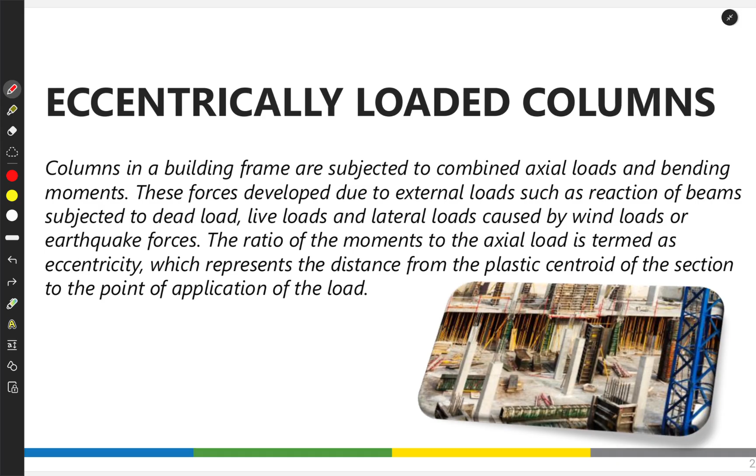So, just a recall, if we want to determine the plastic centroid of a column, that is the combination of the effect of the concrete and the steel from our columns. So these are the failures which occur due to crushing of concrete and the yielding of steel bars.

First, pure flexure. For our pure flexure, the section in this case is just subjected to a bending moment MU, where the axial load PU is equivalent to 0.

Second, compression controls. This occurs when there is a large axial load acting at a small eccentricity. Failure occurs by crushing of the concrete on the compression side with a strain of 0.003, whereas the strain on the steel on the tension side is less than the yield strain, that is ES less than EY. So therefore, Fs is not equivalent to Fy.

Third, tension controls. This occurs when the axial load is small and the eccentricity is large, causing the tension steel bars to yield before actual crushing of concrete. At the point of failure, the strain in the tension side, ES, is greater than EY, whereas the strain in concrete reaches 0.003.

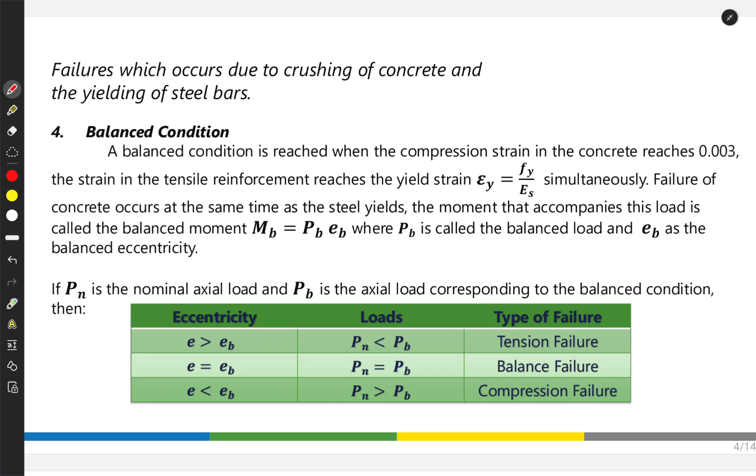For our balance condition, a balance condition is reached when the compression strain in the concrete reaches 0.003, and the strain in the tensile reinforcement reaches the yield strain simultaneously. Ibig sabihin, sabay na na-reach ng concrete yung kanyang maximum strain, which is 0.003, as well as the yield strain for the steel. Failure of concrete occurs at the same time as the steel yields, then the moment that accompanies this load is called the balanced moment.

And the balanced moment will be equivalent now to the balanced load multiplied by the eccentricity, where PB is called the balanced load and EB is the balanced eccentricity. And if Pn is the nominal axial load and PB is the axial load corresponding to the balance condition, then we can conclude these scenarios.

So if our eccentricity is greater than the balance eccentricity, or dito tayo sa ating load magbase, if the nominal load is less than the balance load, that is tension failure. If the nominal load is just equivalent to the balance load, that is balance failure, and if the nominal load is greater than the balance load, that is compression failure.

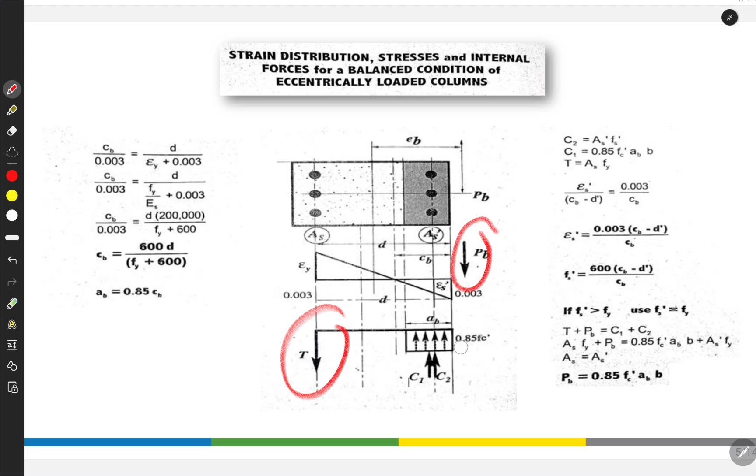F prime S is equal to Fy, so meron tayong ilan? 1, 2, 3, 4 - we have 4 forces. Ito, parehas sila ng direction. Yung C1 at C2 parehas sila. So we can say that T plus P balance is just equivalent to C1 plus C2.

So if we are going to substitute the value of our T, which is ASFY, and yung P balance, as well as yung C2 coming from the steel in the compression side, and the concrete from the compression side.

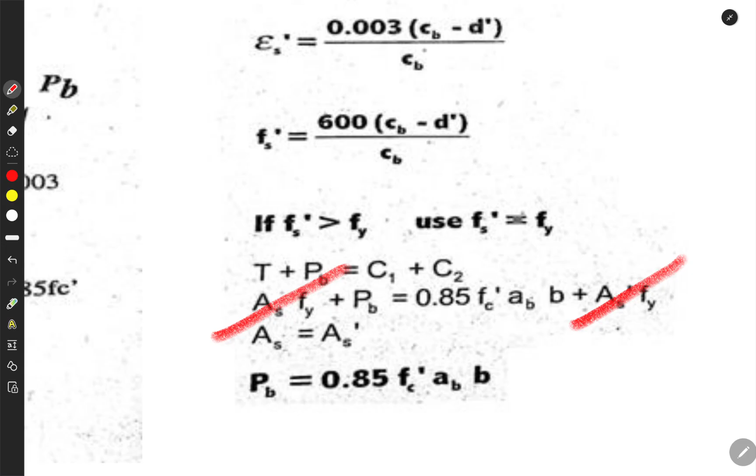Kung mapapansin nyo, kung same lang yung number of bakal dito at dito, diba, same lang din ito, same lang na rin ito. Pero kung ito ay Fy, and if F prime S is greater than Fy, then we will be using Fy, so Fy na rin to. Kung mapapansin nyo, makakancel na tong parehas na to. Ito na siya, so ang natira na lang sa ating equation ay ito na lang.

Okay, so therefore our balance load ay ito na.

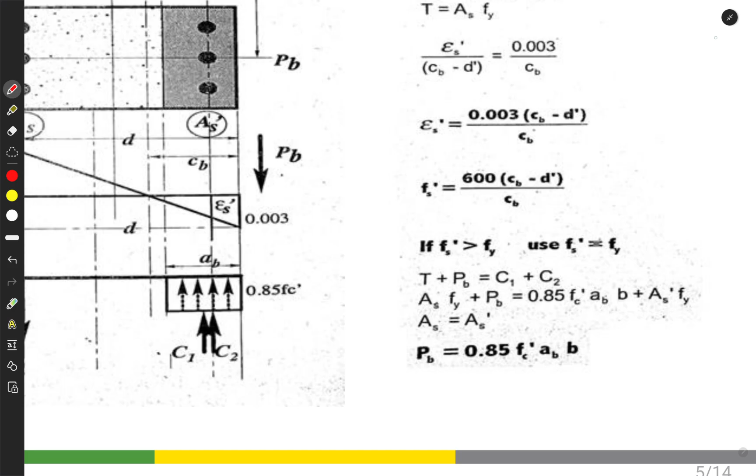So to further understand our topic, let's try to understand this problem number 1. This problem number 1 is similar to CE Board November 2010 and May 2022.

A tied column 450 mm square is reinforced with 8 pieces of 28 mm diameter bar, equally distributed on its sides. The unsupported length of column is 2.6 meters and is prevented to sidesway due to shear walls. K is equivalent to 1.0. The slenderness ratio, F prime C is 20.7 megapascal, and Fy is 415 megapascal. Use 40 millimeters covering measured from the center of reinforcement with tie diameter of 12 millimeters. Modulus of elasticity of steel equivalent to 200 gigapascal.

Neglect the concrete area displaced by the compression steel bars. For our letter A, determine the nominal load that the column could carry. Letter B, determine the balance load using concrete strain value of 0.003, and yield strain of steel EY equivalent to Fy over ES. And C, determine the balance moment.

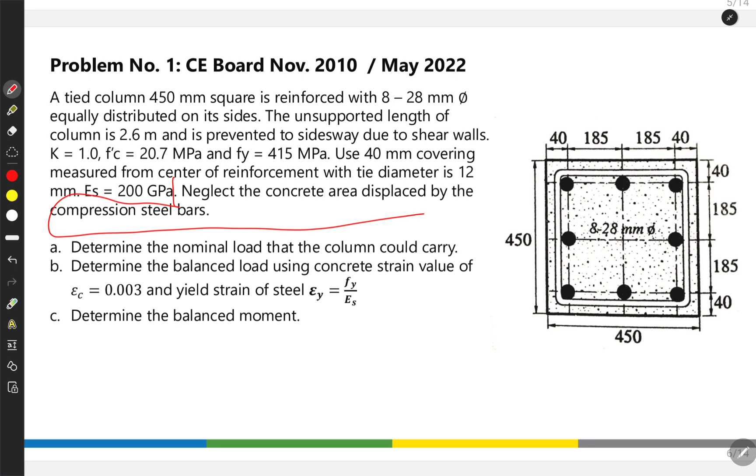Okay, dahil sabi dito, neglect the concrete area displaced by the compression steel bars. So doon sa ating compression steel, instead of using F prime S minus 0.85 F prime C, hindi na natin ito i-consider. So F prime S lang ang gagamitin natin. Pero kung hindi sinabi dito, walang sinabi na anuman, always consider.

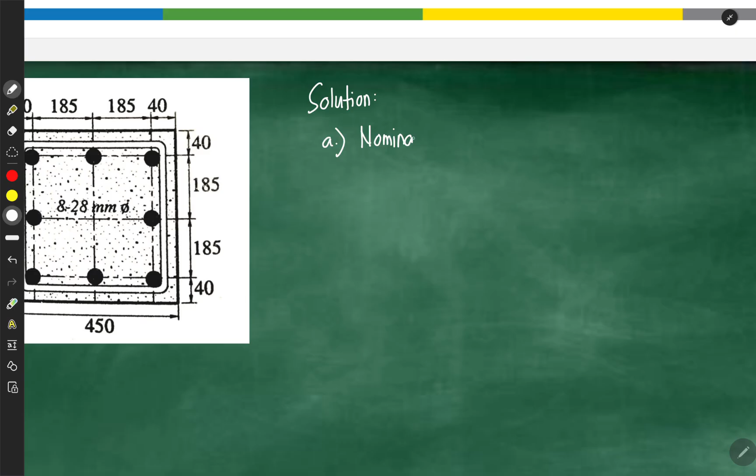Okay, let's solve for letter A. Letter A is just the nominal load that the column could carry. So for our solution, for our letter A, that is just our nominal load, yun lang yung ating PN.

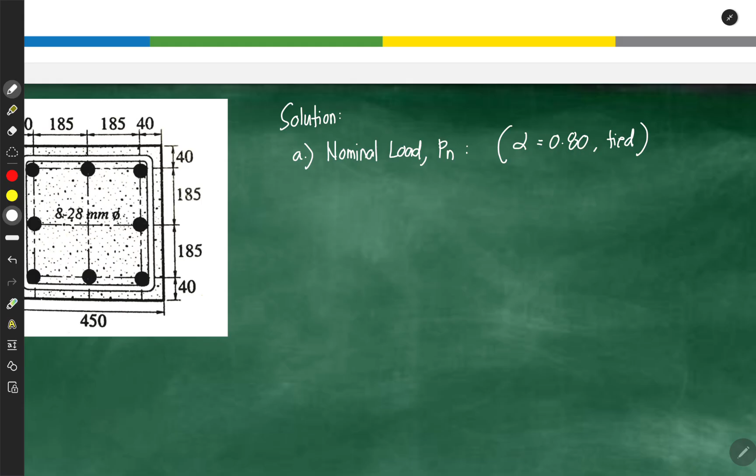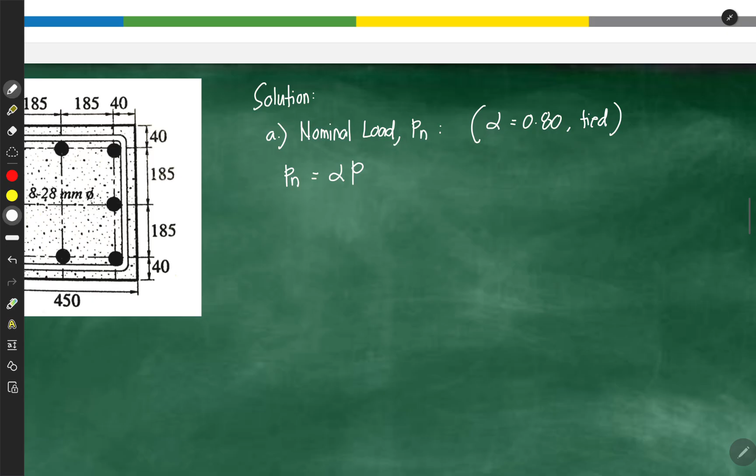Okay, kung mapapansin nyo naman, our column is just a tied column, so therefore yung alpha natin is just equivalent to 0.8, that is for tied column. So nominal load is equivalent to alpha times P, so let's substitute na. Or pakita ko na lang yung formula para ma-recall pa rin natin.

0.85 F prime C times gross area, multiplied by... minus AS, plus coming from the steel, ASFY.

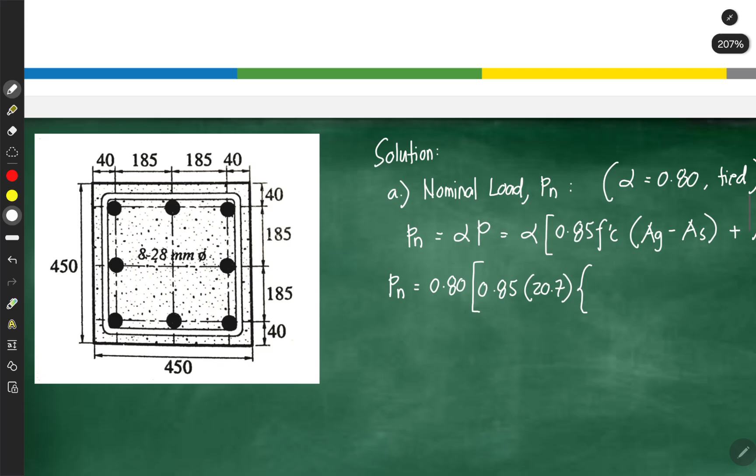Okay, so let's substitute to solve for the nominal load. So for our nominal load, that is 0.8 times 0.85 F prime C natin, we have 20.7, yung cross-sectional area natin, we have a total of 450 by 450, so that is just a square. 450 squared minus yung sa ating steel bars. We have a total of 8 pieces of 28 mm bar. Then for our steel bars...

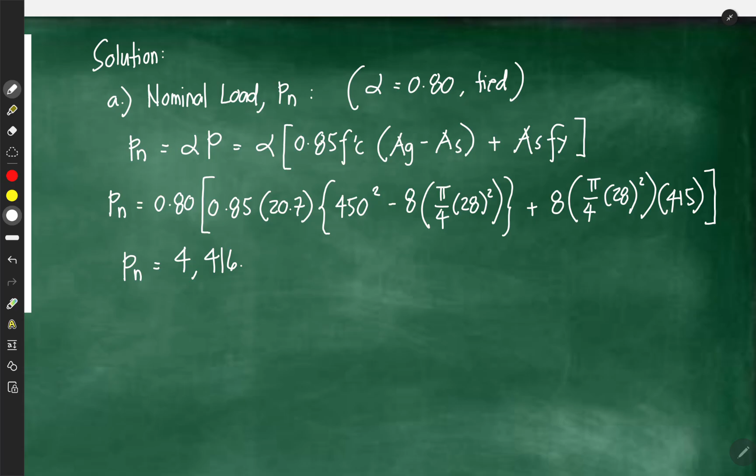So, ganun din, 8 pi over 4, 28 squared, Fy natin we have 415. So our nominal load will now be equivalent to, then divide this by 1,000 na to make that in kilonewtons. So, 4,416.4891 kilonewtons. This is for our letter A.

Next, for letter B, let's solve for balance load, or yung PB. Okay? But let's try to understand first yung ating column.

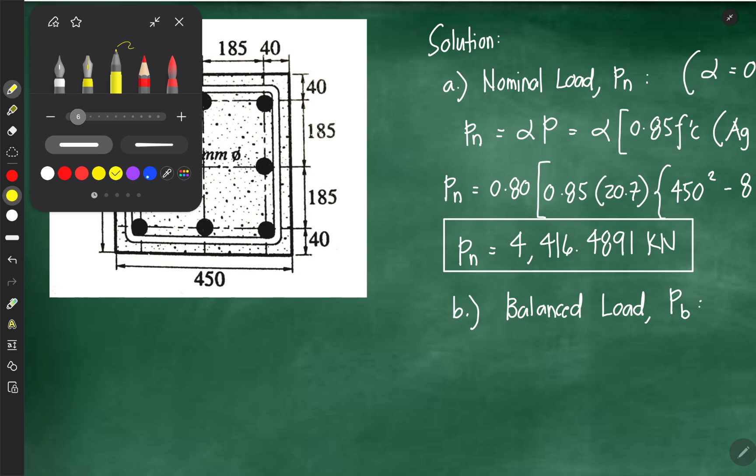Una, so let's say nandito yung ating neutral axis. Nung na-break na yung ating bakal at ang natira na lang or yung concrete doon sa ating tension side at ang natira na lang ay nandito. Let's say for example, yung neutral axis natin ay nandito and that is from, yan manggagaling yung ating C balance.

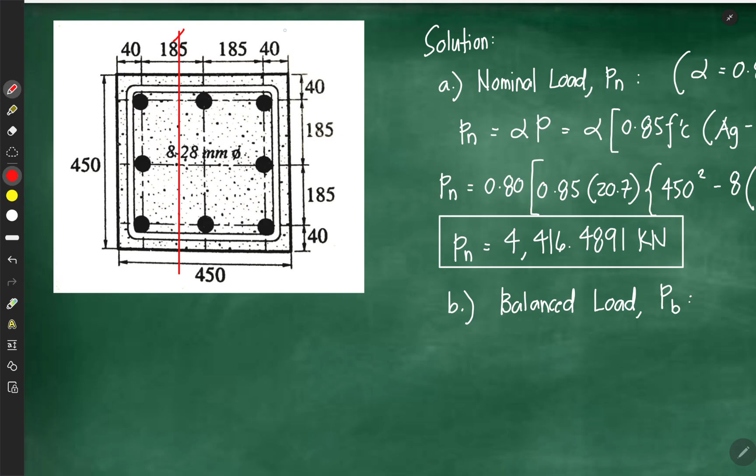So mula dito, dahil balance condition lang tayo, this is our C balance. Let's just assume that yung A balance natin ay hanggang dito lang. Dito. So, itong lahat ng to ay for concrete.

Yan. But take note, kailangan nating malocate kung asan yung C balance para malaman natin if yung bakal natin dito sa gitna is compression side ba siya, nasa compression side ba siya, or nasa tension side. So this is just an assumption.

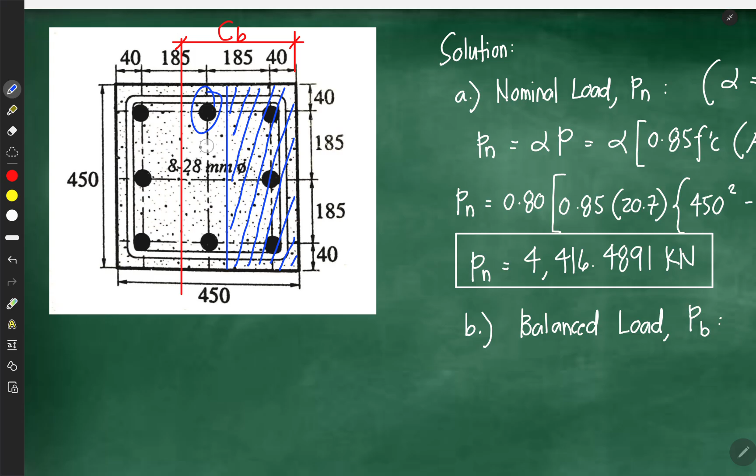So patunayan muna natin, isolve natin yung C balance para malaman natin kung yung bakal ba natin dito sa gitna ay compression. Of course, yung bakal natin ditong part na to is compression side na yan. Pero what if nga itong bakal na to or yung neutral axis natin ay nandito. So, therefore, this two steel ay magiging tension kung ganun man. Pero kailangan muna nating masolve si C balance para malaman natin kung yung dalawang bakal ba natin ay tension or compression. Okay, so ganito yon.

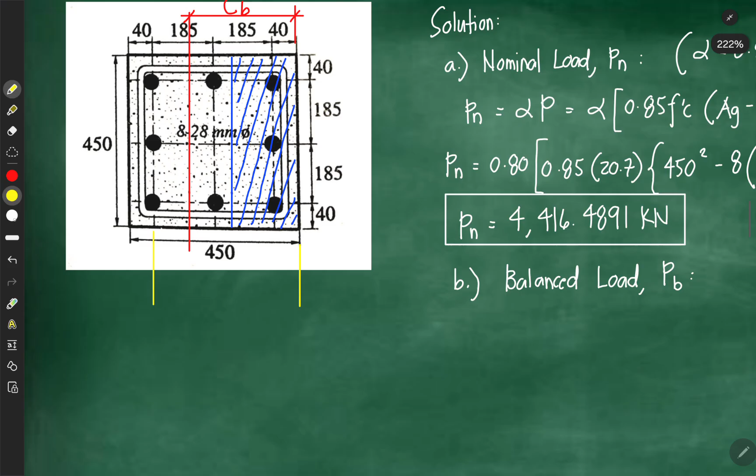Okay, so dito muna tayo. Ayan. So una, yung bakal natin sa tension side. Ito na yung ating T. Next, of course, sabi natin kanina, ito yung ating

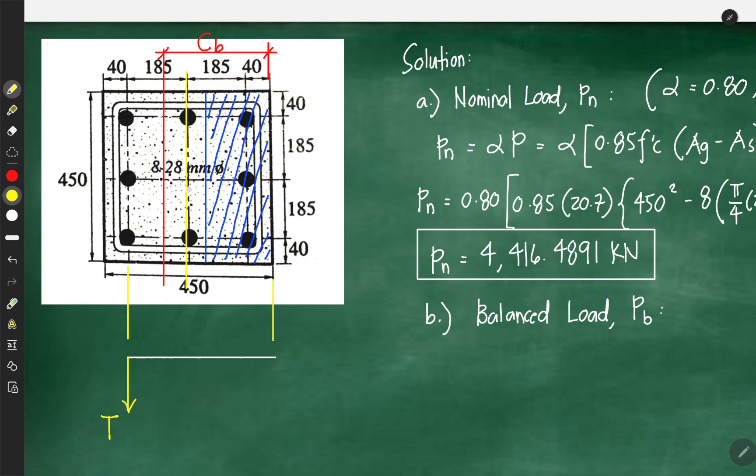plastic centroid, and from that, dyan manggagaling yung ating raw balance, load balance. So, nandito siya. Let's say, andito yung ating balance load. Ito na yung ating balance eccentricity. Again, this is our plastic centroid, no? Always from our plastic centroid. Next,

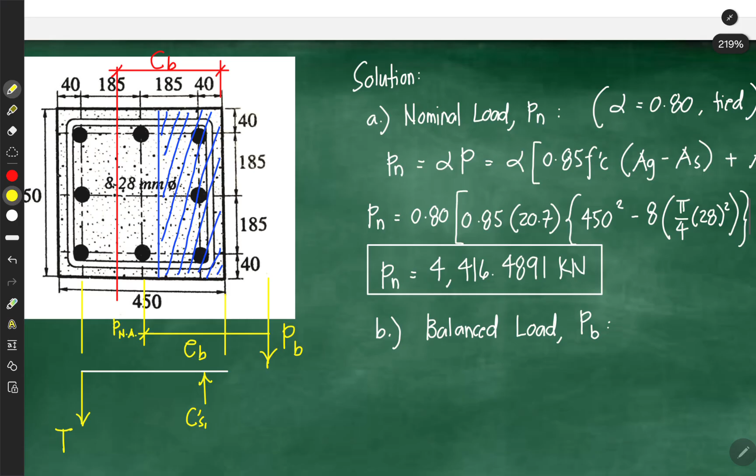yung bakal na to, pangalanan ko to as C prime S1. Or dito na lang. Tapos yung bakal dito, saglit lang. I-solve muna natin siguro si C balance para malaman natin kung compression ba yan or tension. Okay. So, yung concrete muna tayo. So, sa gitna nito, pangalan ko to as CC.

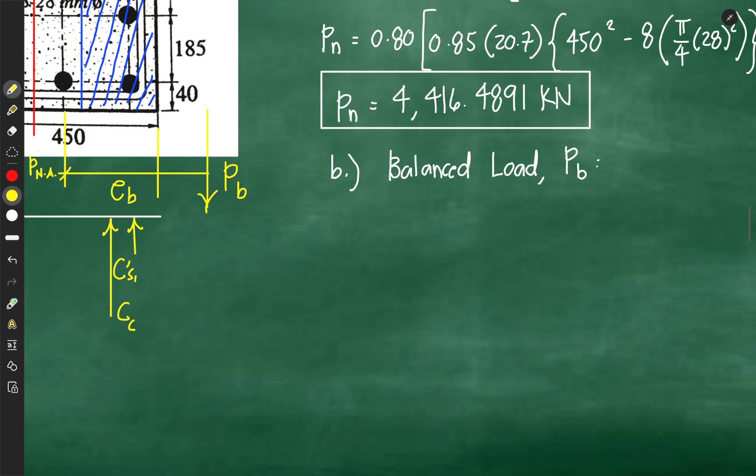So, i-solve nga muna natin si C balance para malaman natin kung asaan si C balance. So, pwedeng gamitin natin yung formula for C balance. Pero kung makalimutan nyo yun, okay lang din. Nanggaling lang din naman yan sa Fs equals 600, D minus C over C. Sabi natin, for balance condition, Fs is just equivalent to Fy.

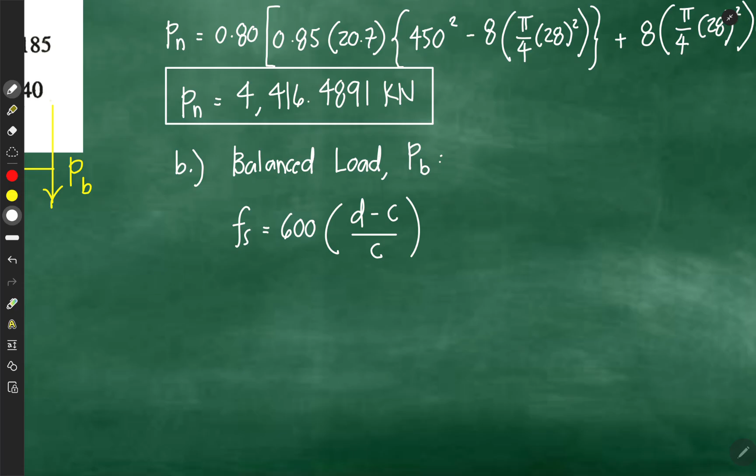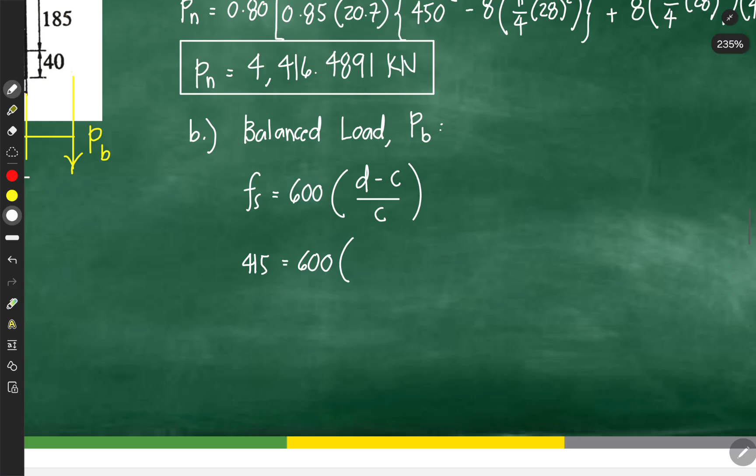So, ano nga ba yung Fy natin? 415. So, to get balance condition, i-equate lang natin to sa value ng Fy. So, that is just 415, 600. So, by the way, what is our effective depth muna?

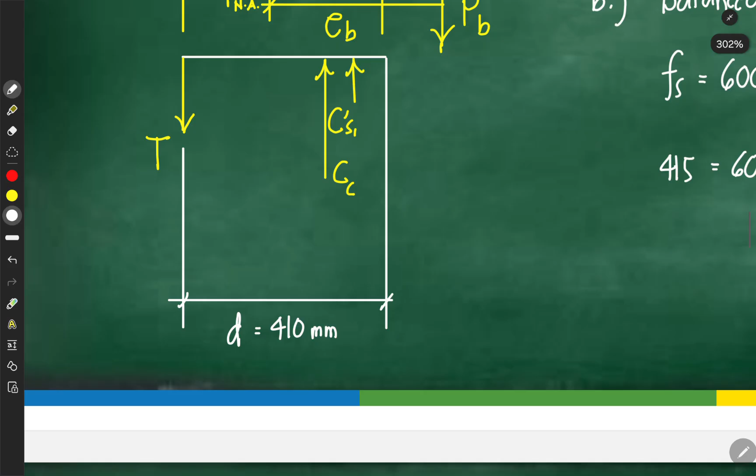So, yung effective depth natin, of course, from dito, mula dito. So, this is our effective depth. What's the value of our effective depth? So, if this is 450, minus ko na lang yung 40. So, natira na lang ay 410. Take note, yung ating concrete covering mula sa ating steel, centroid ng steel bars.

Pero, kung ang binigay ay hanggang dito lang, then kung given naman yung diameter ng ating ties, so, kailangan nyo munang isolve yung distance mula dito hanggang dito. Pero dahil nagkataon na yung given naman na ay mula dito hanggang dito sa gitna ng ating steel bars, so let's just deduct that 40 to get the value of our effective depth.

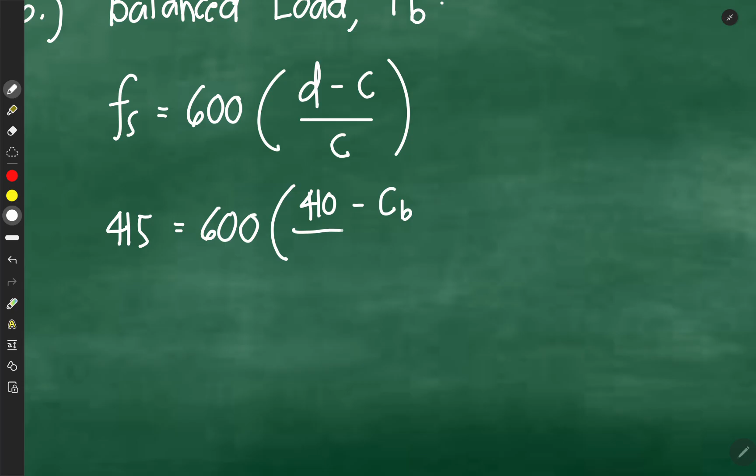So that is 410 minus, so dahil inequate na natin yung Fs sa Fy, so therefore this is now our C balance. So the value now of our C balance will now be equivalent to 242.3645

millimeters. And to solve for A balance, that is just A balance is equivalent to beta one C. So, dahil yung f'c natin ay less than 28 megapascal, so 0.85 lang to. So, this is equivalent to 206.0099.

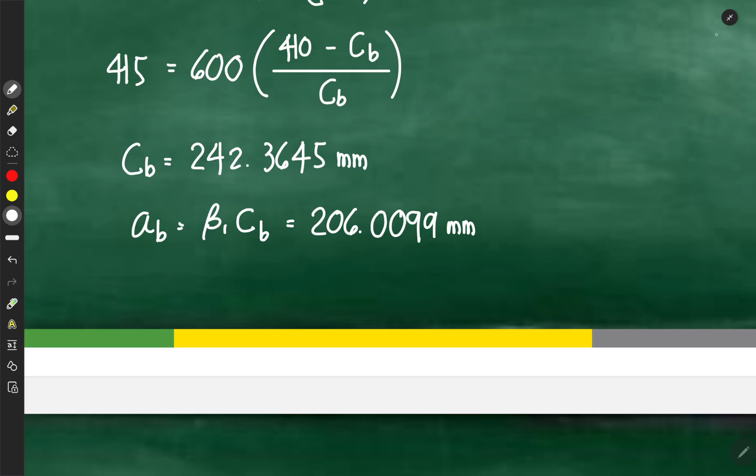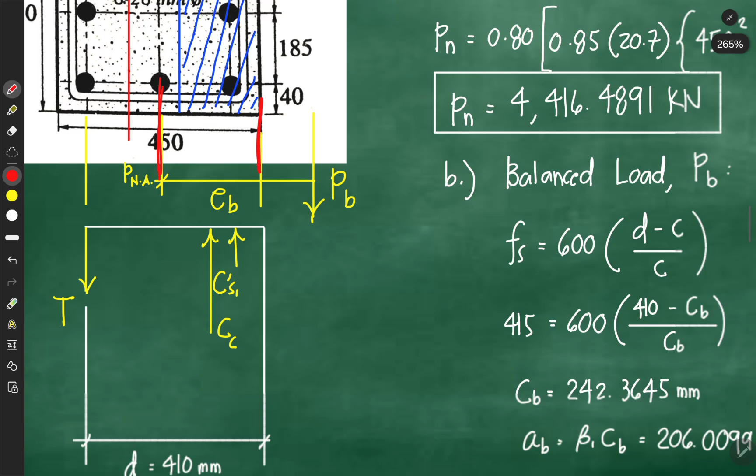millimeters. Okay, so meron na tayong C balance. So therefore, if our C balance is 242, kung yung half ng ating column, kung mula dito hanggang dito, that is half ng 450 or 225. So tama yung assumption natin na somewhere nandito yung C balance. So therefore, we can say now that the two steel na nasa gitna is nandun pa rin siya sa compression side. Okay? So, ito na siya.

Pangalanan ko to ngayon as C prime S2. Okay? So, ilagay natin yung mga distances. Kung yung C prime S1 ay nandito, so yung distance niyan is just 40 mm.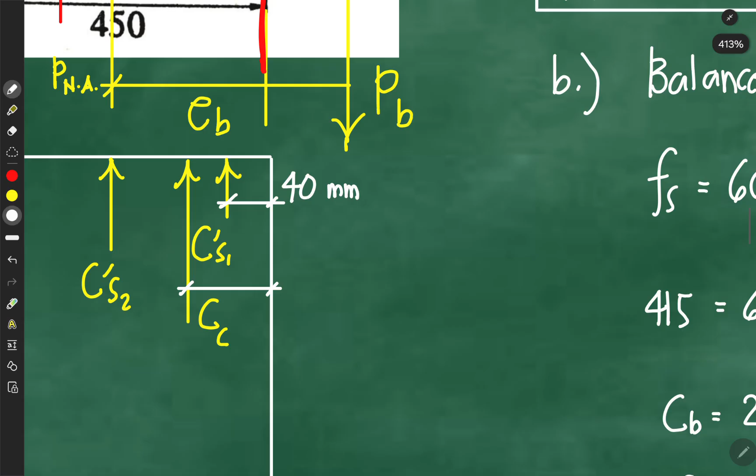Ito naman, yung CC, that is just half ng A balance. Yung C prime S2 naman, half ng 450, or that is just 225 mm. Okay?

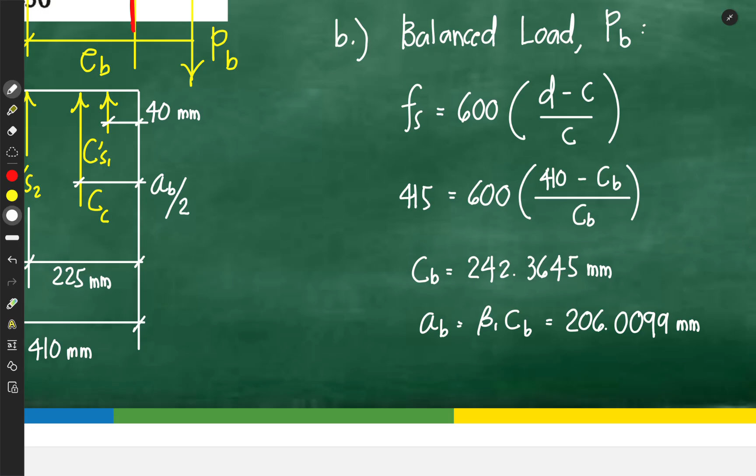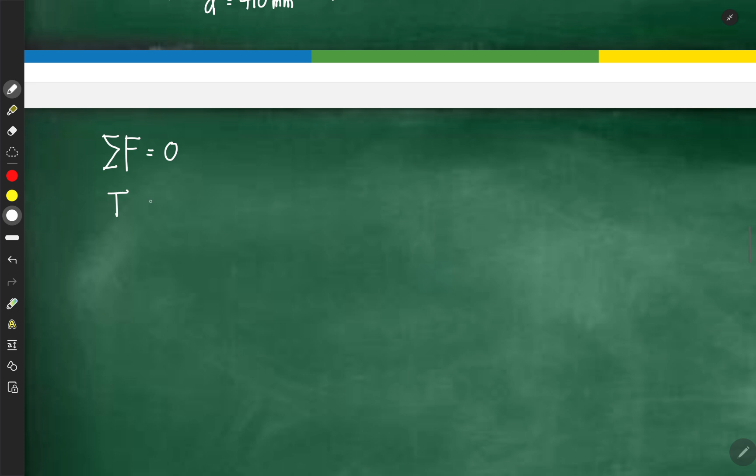So let's solve now for the value of our P balance. We have a total of 5 loads or 5 forces. Summation of forces equal to 0. Solve for balance load. So that is just, P balance is just equal to C prime S1, C prime S2 plus CC.

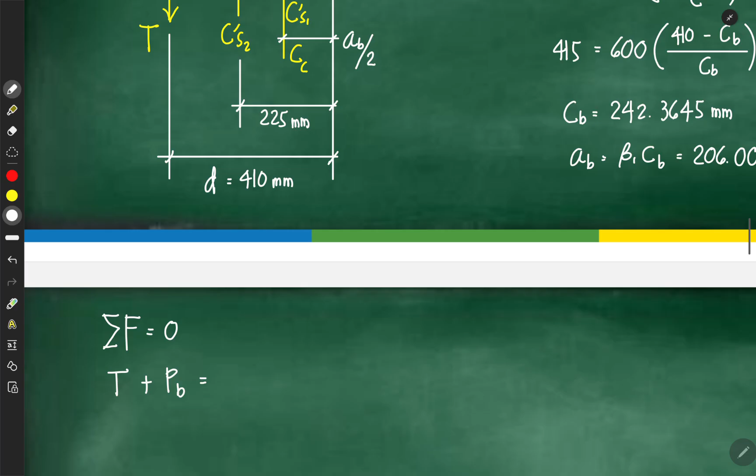But take note, for balance condition, we can say that yung AS FY dito ay parehas lang na magiging AS FY sa C prime S1. So makakancel lang ito. So ang natira na lang, yung load balance natin is C prime S2 plus CC.

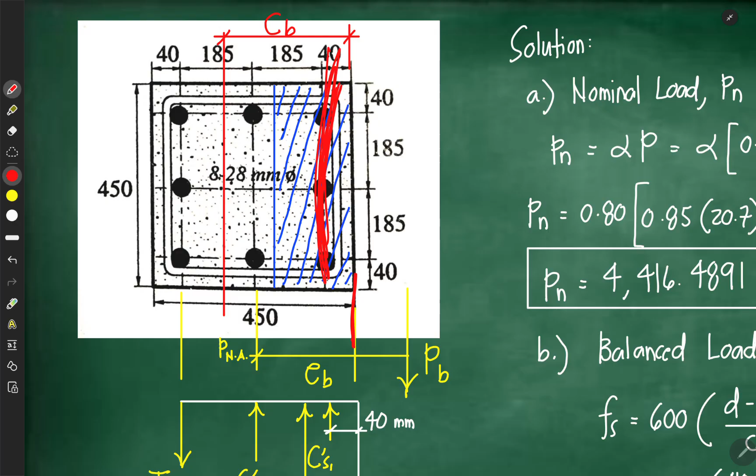But this time, ano ang gagamitin nating FS dito sa ating F prime S sa C prime S2? Kung FY ba na 415, o kailangan nating malaman kung ano yung gagamitin nating F prime S or FS. Kasi automatic for load balance, yung F prime S natin dito ay FY na yon. Kaso nga lang, sigurado ba tayo na mag-yield yung ating bakal dito? Hindi pa. So dapat mapatunayan natin na yung FS dito should be greater than FY para magamit natin na 415 o equivalent of 415. However, kapag hindi siya nag-yield, gagamitin natin mismo yung nandyan. Okay? Galing lang din naman yon sa ating strain diagram.

So let's draw yung ating strain diagram. Check if C prime S2 will yield.

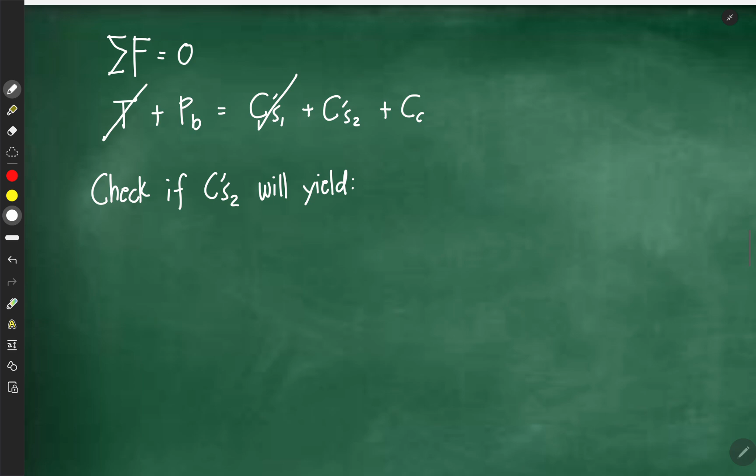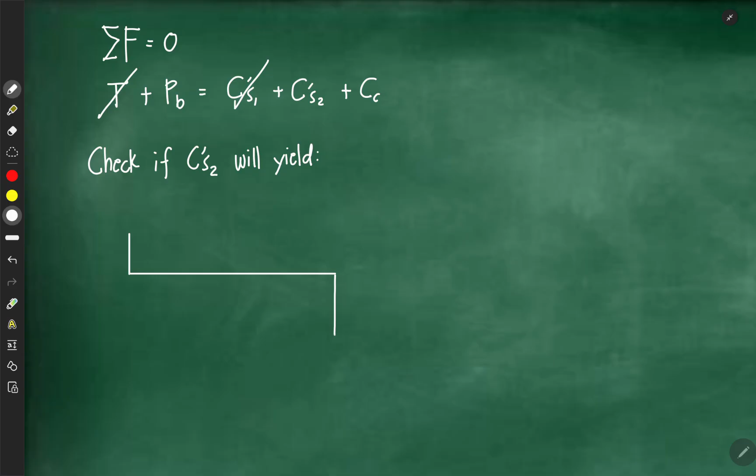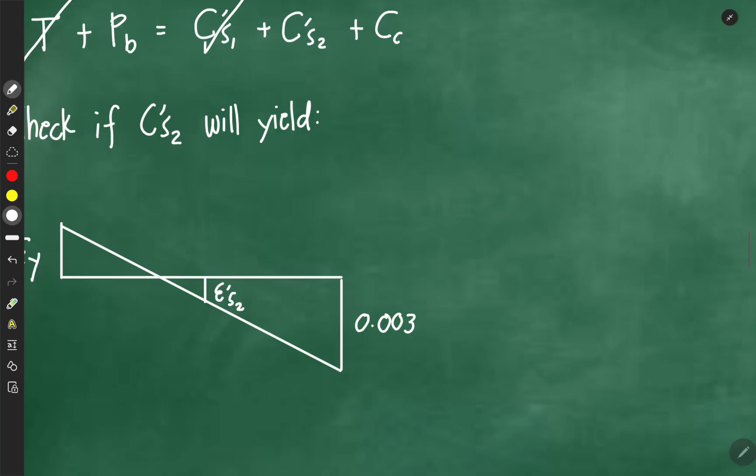So ito yung ating EY. For balance condition, this will be our EY. And simultaneously, na-reach din yung maximum for concrete. So sa gitna, nandito si E prime S2. Supposed to be, meron pa tayong E prime S1 dito, pero alam naman na natin, na-cancel lang din naman. Ito ay dito. Yung ating concrete, na-reach niya yung 0.003. Yung ating bakal na isa, at ito yung nasa gitnang bakal.

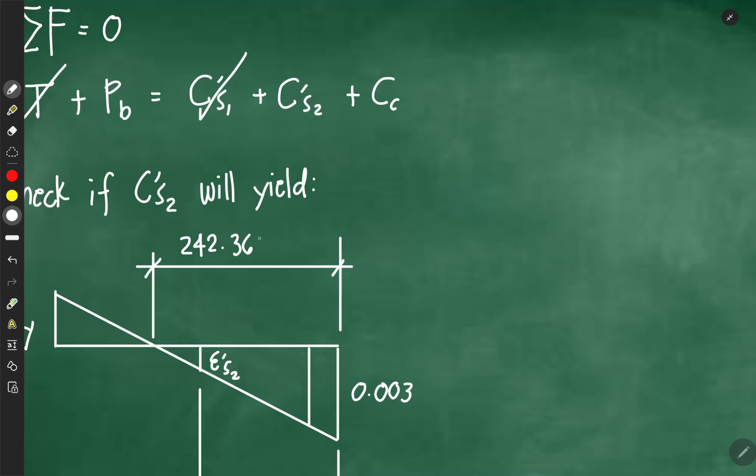Okay, so ilagay ko lang yung distances. Mula dito hanggang dito, it's just half of 450, or that is 225 mm. At mula dito, ito yung ating C-balance. At yung C-balance natin ay 242.3645 mm. So kung yun ay 242 at ito ay 225, ilan na lang natira dito? Dito. So 242 minus 225, that is just 17.3645. So ito na yung ating strain diagram.

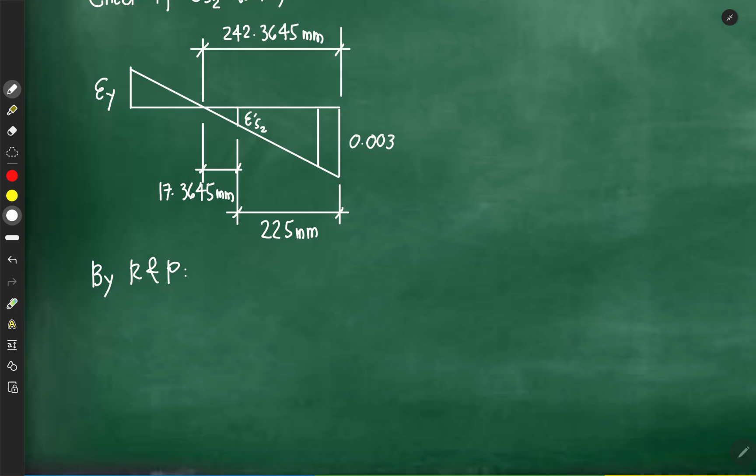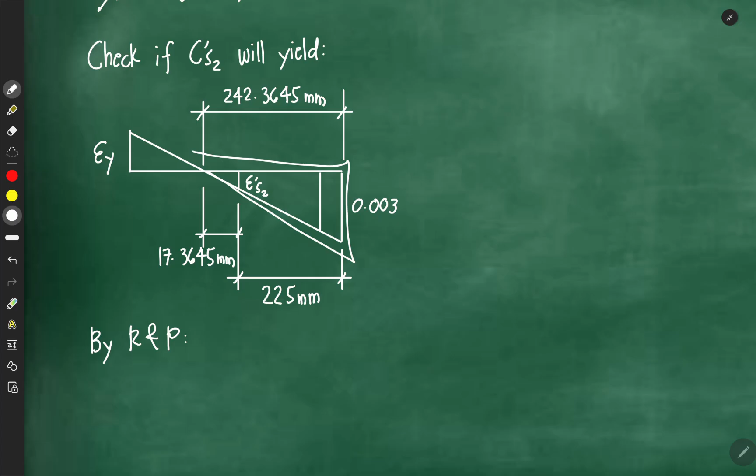So to solve for our E prime S2, mag-ratio and proportion na lang tayo. I-ratio ko na lang tong maliit na triangle na to sa triangle na to. Itong maliit na triangle na to dito sa triangle na to. So first, E prime S2 over 17.3645 is equal to 0.003 over 242.3645.

Okay, so cross multiply. Kapag nilagay natin dyan, this will give us a value for E prime S2, which is equivalent to 2.1494 times 10 raised to negative 4. At dahil strain yan, sabi natin, strain is always equal to Fs over Fy, I mean Es, I should say.

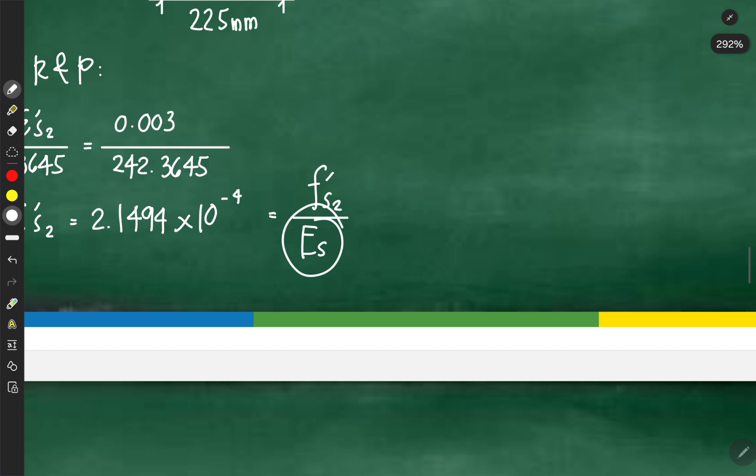So yan na yun. Pero dahil yung bakal sa gitna ang pinag-uusapan natin, pangalanan ko to as F prime S2. Of course, ito pa rin yung modulus of elasticity of steel, so that's still 200,000 megapascal. Let's cross multiply, ang matitira na lang ay F prime S2. So therefore, the value of F prime S2 will now be equivalent to lagay ko na lang dito 2.1494 times 10 raised to negative 4, substitute ko na yung value ng ES, which is 200,000 megapascal. So this is now equivalent to F prime S2 will be equivalent now to...

42.988. Malalaman ba natin kung nag-yield yung bakal doon sa gitna? Yes. So we can say that yung bakal sa gitna ay hindi niya na-reach yung Fy, so therefore hindi siya nag-yield, or that is just less than Fy. So therefore, we're going to use F prime S2 equivalent to 42.988 megapascal.

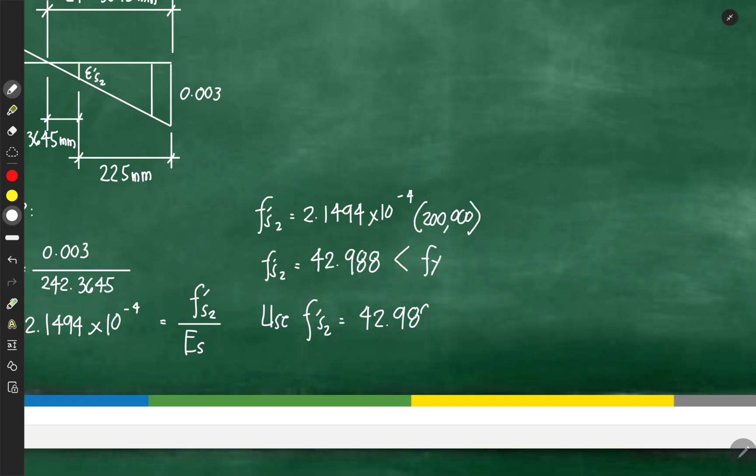Okay, meron na tayong value for F prime S2. Bakit natin sinolve to? Para malaman natin kung nag-yield ba yung bakal doon o hindi. Kung nag-yield yun, let's say for example mas mataas pa to sa Fy, ang gagamitin natin ay Fy only. Pero dahil mas mababa siya kaysa sa Fy, yung value niya mismo ang gagamitin. Okay, so let's substitute na dito.

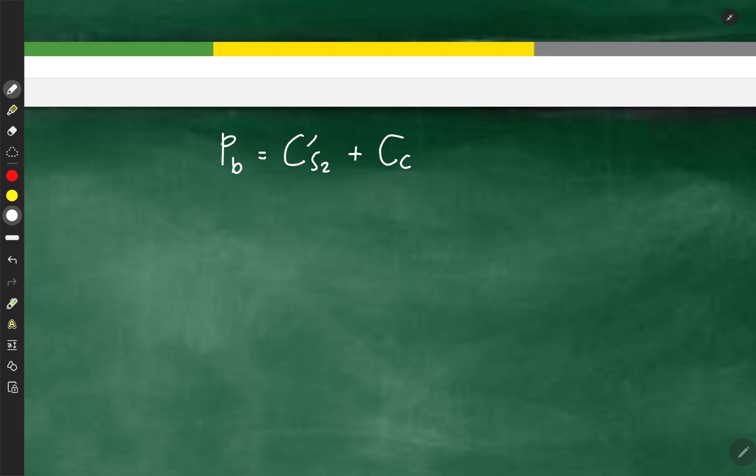So ang natira na lang ay PB is equal to C prime S2 plus CC. Again, PB, load balance, C prime S2 yung bakal natin sa gitna, plus yung force natin coming from our concrete. So let's substitute, ilagay ko na lang dito yung C prime S2, by the way, that is of course AS FS lang yun, A prime S2, F prime S2.

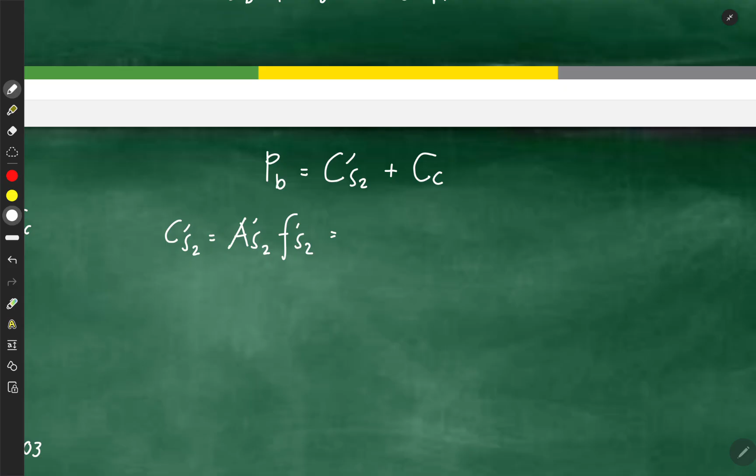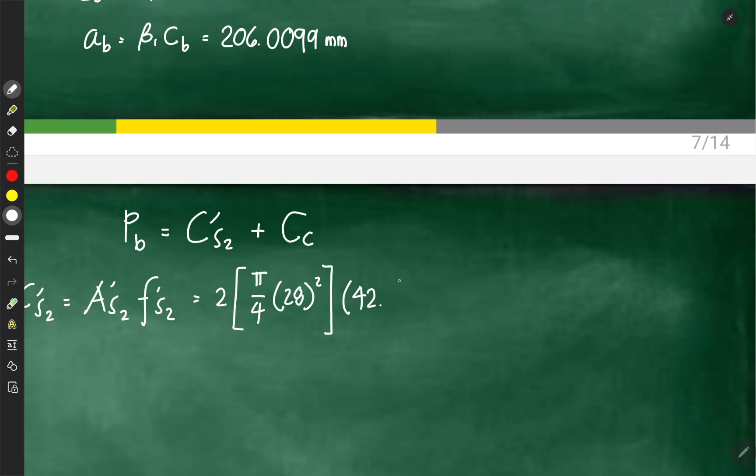So let's substitute. Meron tayong dalawang bakal na 28 mm, yung sa gitna, ito yun, dalawa na lang natira dyan. Pi over 4, 28 squared, then F prime S2, yun ay 42.988 kanina. So this is equivalent to, divide by 1,000 para gawing kilonewton, 52.9399 kilonewtons.

Next, for CC, that is 0.85 F prime C, A balance, B. Let's substitute: 0.85, F prime C we have 20.7, A balance na-solve na natin kanina, 206.0099, then B, of course, 450 lang din, ito yung B natin.

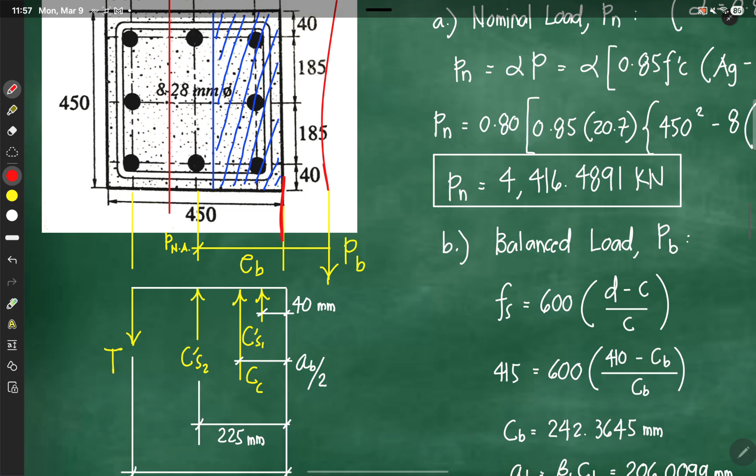So, yung CC natin will now be equivalent to 1,631.1349 kilonewtons. Okay, let's substitute. Lagay ko na dito siguro. So, balance load will now be equivalent to C prime S2, 52.9399 plus 1631.1349. So, this is now our balance load, equivalent to 1,684.0748 kilonewtons. This is our answer for balance load.

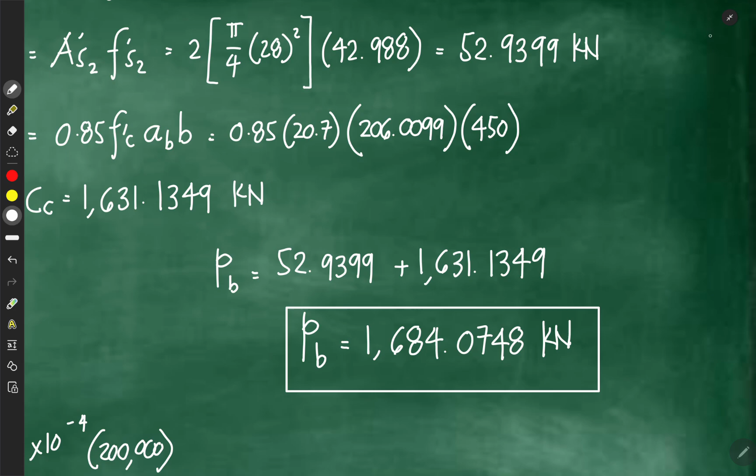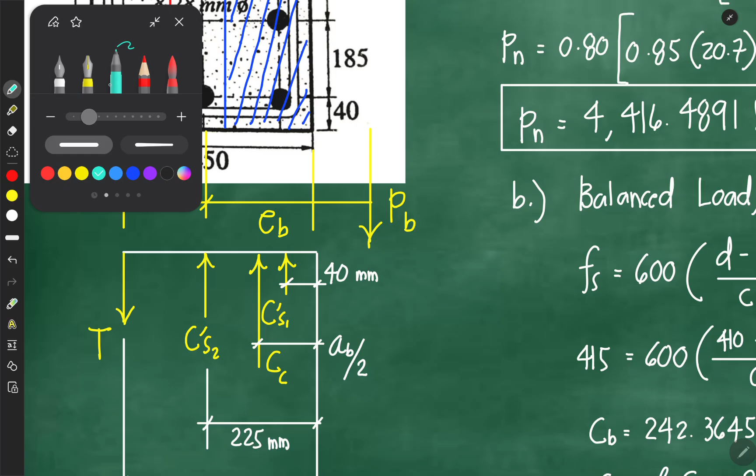Next, for our letter C, determine the balance moment. So, yung balance moment natin, dahil meron tayong eccentricity dito, from our plastic centroid, so meron tayong balance load. Ito na yung tinutukoy nating balance moment.

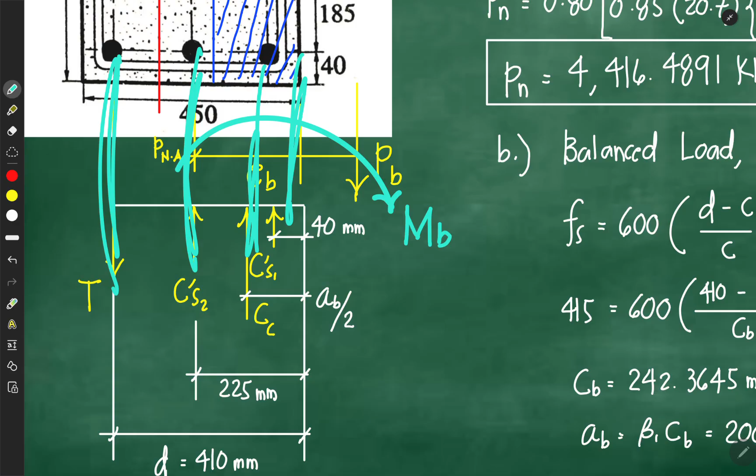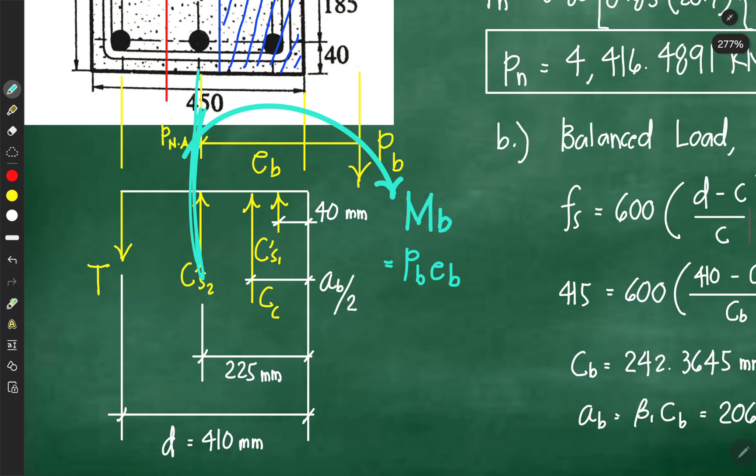So, how to solve that? That is just simply load balance multiplied by eccentricity. Pero, of course, magmo-moment din yung mga forces natin dito. So, kahit saan ka mag-moment, pwedeng dito, pwedeng dyan, para makuha yung balance load or balance moment, I should say, dapat always equivalent to load balance multiplied by eccentricity. So, laging ganito. Kung dito ka nag-moment, dapat i-factor out mo pa para makuhang maging load balance multiplied by eccentricity. So, para safe ka na, dito na lang tayo mag-moment sa ating plastic centroid.

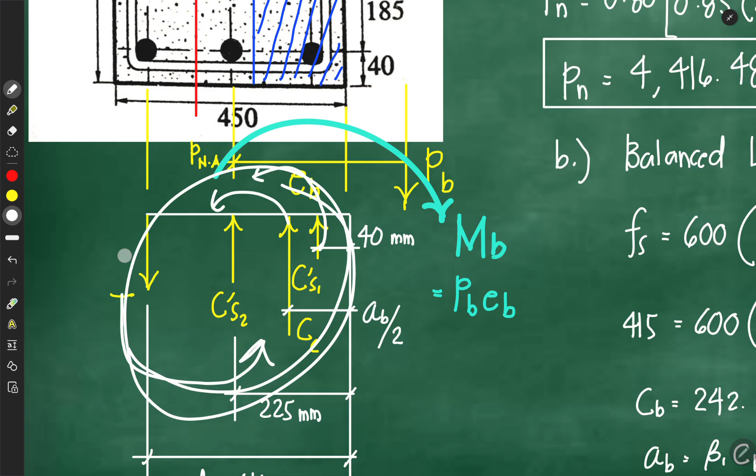So, to solve for our balance moment, kung mapansin ninyo, yung ikot ng ating balance load ay papunta siya dito. Or yung balance moment is just equivalent to yung T, ang ikot niya papunta dyan. Ito rin naman, pag ganyan. Kung mapapansin nyo, they will form counterclockwise moment, at sila yung magka-counteract doon sa ating balance moment na nagmo-moment as clockwise. Okay, so equate na natin kaagad doon. Balance moment is just equivalent to itong mga to. Ito, iikot dito, ito, dyan, ito, papunta din naman dyan. Again, mag-moment tayo doon sa ating plastic centroid.

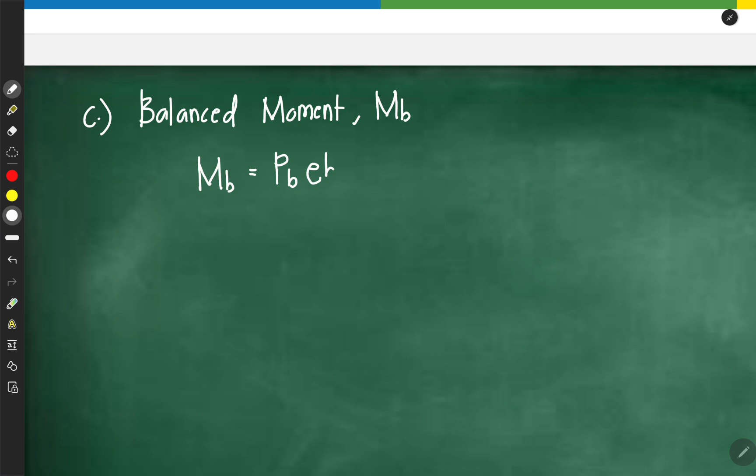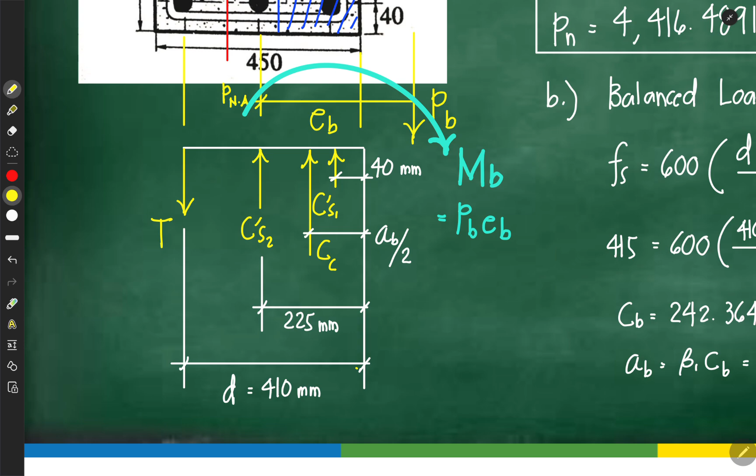Balance moment or MB. So, moment at, pakita ko na lang dito. Balance moment is ito. Moment at plastic centroid. So, equate ko na kaagad. Balance moment is equal to, una, yung T. Ano yung distance niya papunta sa plastic centroid? Yung T papunta dito. So that is just 410 minus 225. Ito na yung distance niya.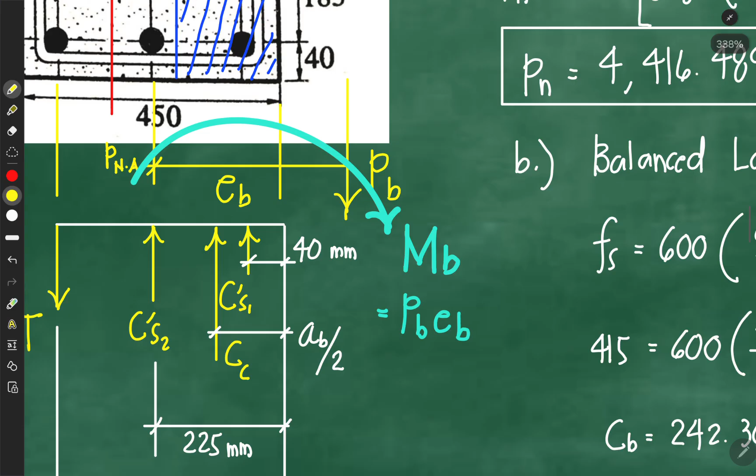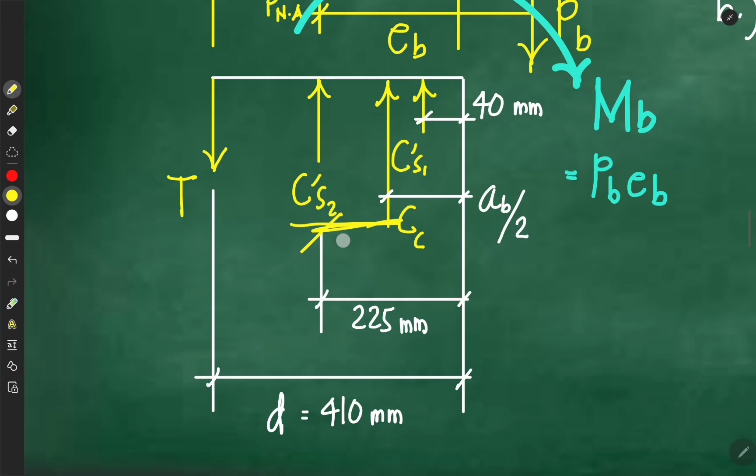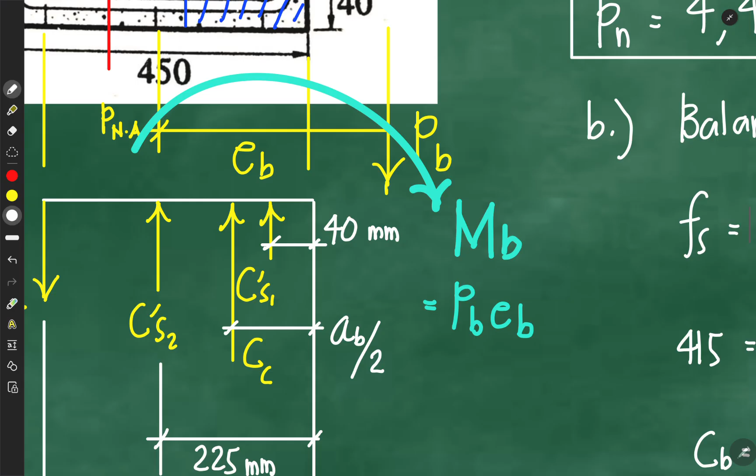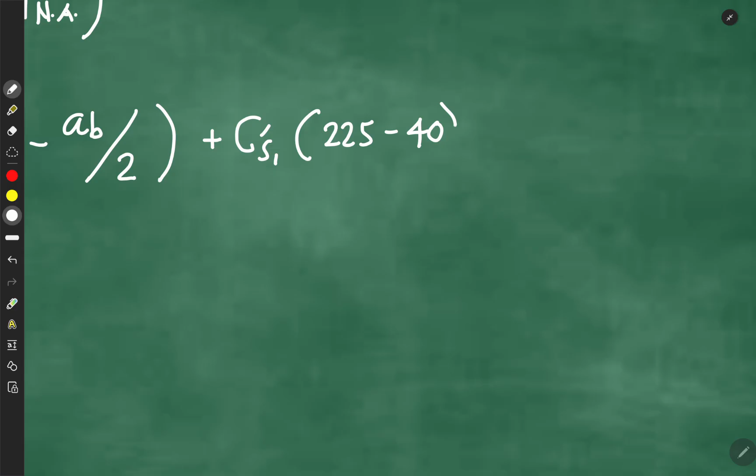Pakita ko dito: T, 410 minus 225. Next, yung CC. Yung distance niya mula dito hanggang dito, if that is AB over 2, so this is just equivalent to 225 minus AB over 2. Ito na yon, yung distance from here to here. So plus CC, 225 minus AB over 2. Then finally yung C prime S1, ang ikot niya pa rin ay counterclockwise. So ang distance naman niya from here to dito, if ito ay 225, we can say that 225 minus 40 na lang. Ito na yung natira mula dito hanggang dito. So 225 minus 40 na yun. Okay, so let's substitute for the value of T, CC, and C prime S1.

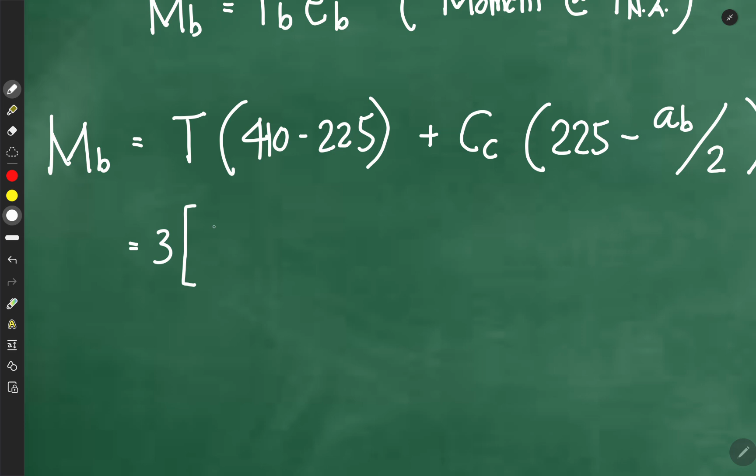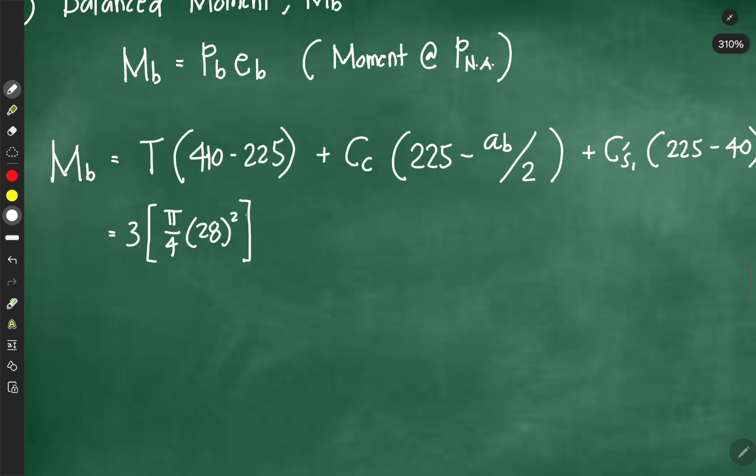So first, dito tayo kay T. Ilan yung bakal sa tension side? We have 3 pieces of 28 mm diameter bars. ASFY pa rin yan. So 3 times AS, pi over 4 times 28 squared, FY 415. Ito 410 minus 225, that is just 185.

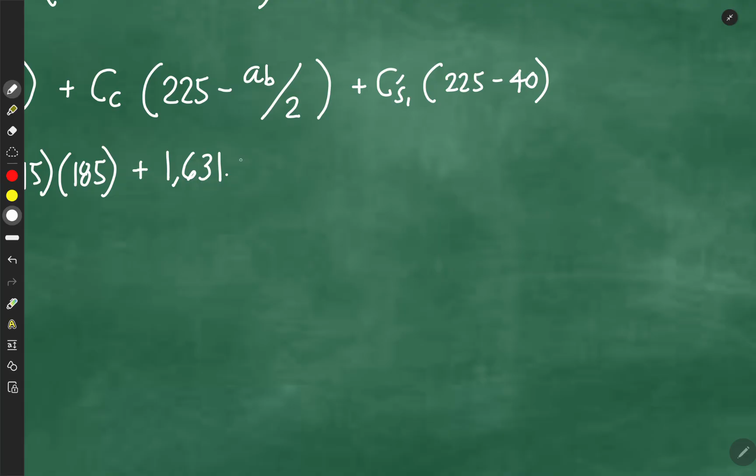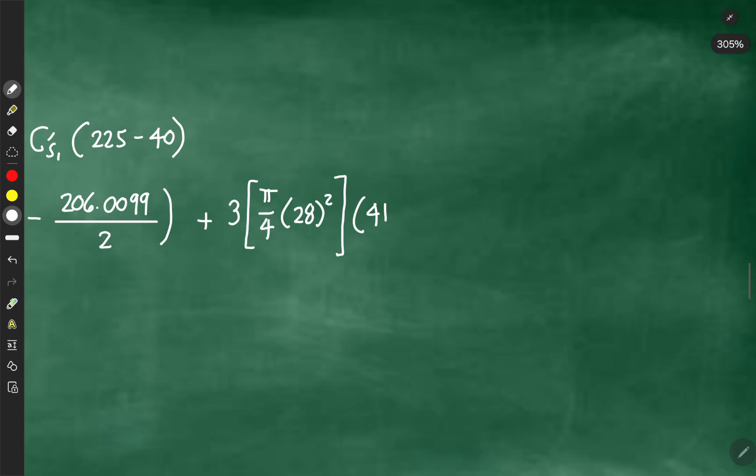Next, CC. Ang CC natin kanina, na-solve na natin. We have 1631.1349. Then 225 minus A balance. Na-solve natin din yun kanina, which is 206.0099 over 2. And next, C prime S1. Meron din tayong tatlong bakal doon. And of course, dahil ito ay balance condition, yung F prime S1 is just equivalent to Fy. So plus 3 pieces of pi over 4, 28. This is 415 din. And ano yung distance nila? 225 minus 40, that is also 185.

Okay, so calculating this equation, this will give us the value for balance moment. And the balance moment will now be equivalent to 482.6366. Take note, naka-Newton millimeter to kapag kinonsider natin lahat. So, alisin na lang natin yung times 10 raised to 6. Gawin na natin kilonewton meters. This is now the answer for our balance moment.

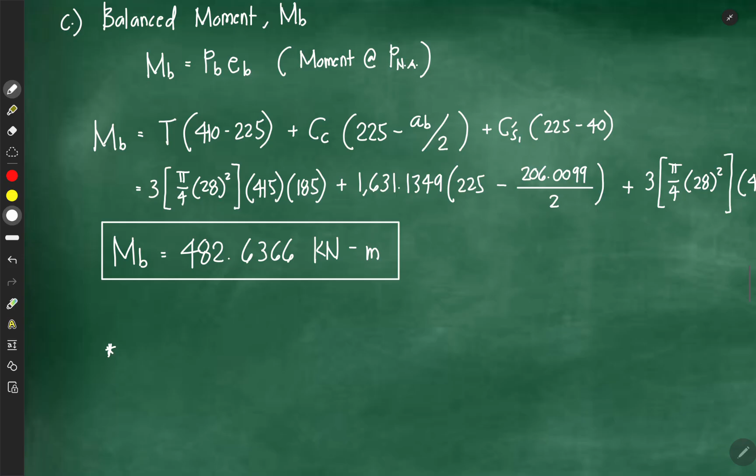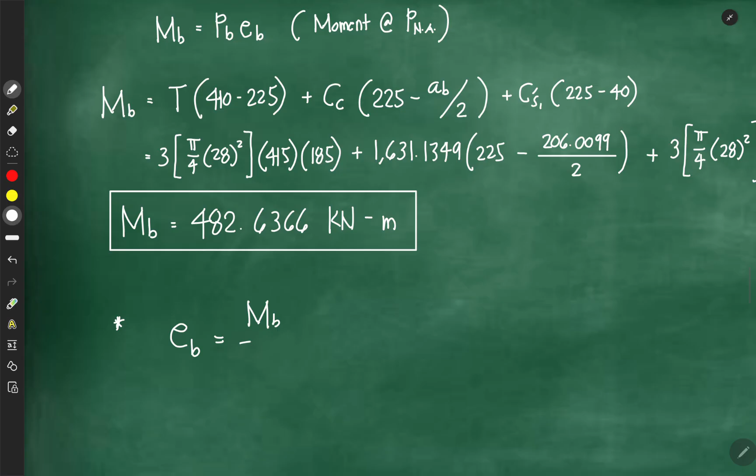Okay, so additional question lang. What if ang tinatanong pa rin, or additional question is the balance eccentricity? Ito na yon. So, gamitin na lang natin yan. Na-solve naman na rin natin yung balance load kanina. So, therefore, if ang tanong is balance eccentricity, cross-multiply, we can say that balance eccentricity is just balance moment divide by balance load. Okay, so let's substitute.

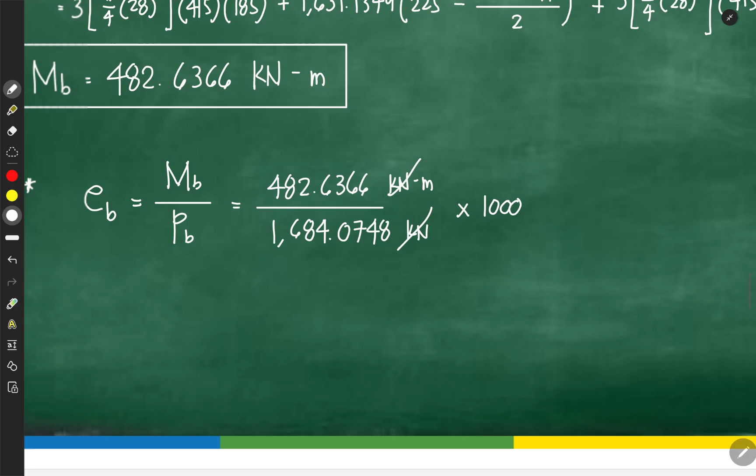482.6366 divided by yung balance load natin kanina, 1684.0748. Take note, this is kilonewton meter and this is kilonewtons. Makakancel yung kilonewtons. Ang natira na lang ay meters. So, to convert this into millimeters, just multiply by 1,000. So, therefore, our balance eccentricity will now be equivalent to 286.5886 millimeters. This is for additional question kapag ang tinatanong is balance eccentricity. So, this is for problem number 1.